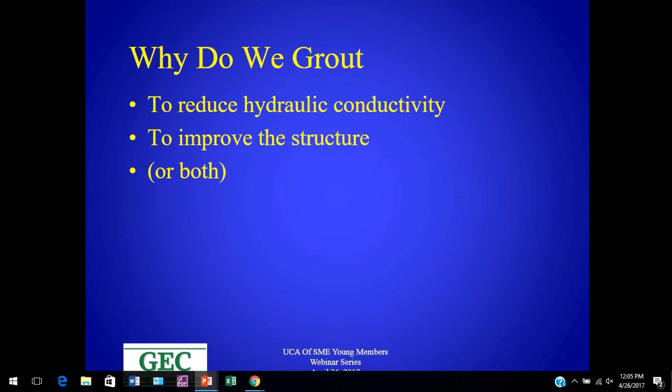So, who grouts? You do. I don't care who you are, if you are going to be working in the underground industry for any length of time, then you're going to run into grouting projects. So, therefore, you're going to have to know something about grouting. And I think that it's important whenever you're going into a project to kind of know who the players are. So I've broken it down a little bit for everybody, and a lot of times it's somewhat based off experience.

You're going to have people that have done no grouting jobs before, people that have done a few grouting jobs, some jobs, and a lot of jobs. You can generally tell people that have done no grouting jobs. I call them the blissfully ignorant. That's because these are the guys who are asking questions and they're all excited, but they have no idea what they're really about to get into.

Then we have the grouting experts. These people are easy to recognize because they come up and tell you they're grouting experts. They've probably done one or two jobs before, and it was probably before a lot of us were born. But another easy way to recognize them is that they probably aren't going to offer you solutions of how to do stuff right, but they're going to tell you everything you're doing wrong.

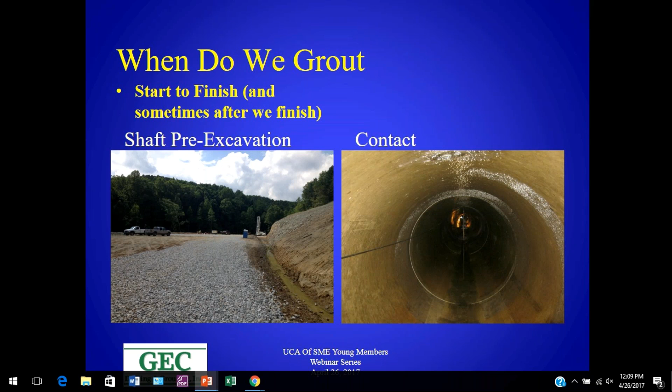All the way down to the very end of the job, when you're finalizing it, you're doing your contact grouting. So grouting can go on at any point throughout the job, and it may even go on after the job. You may go back into old tunnels and regrout them after they've been there for a while. So basically, if you're doing grouting, then you're having somebody breathe down your neck at the beginning so they can get to mining, and at the end so that they can wrap up the job.

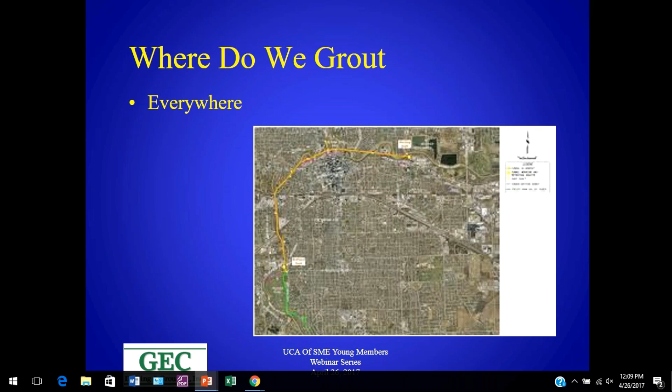Where do we grout? Everywhere. All along the tunnel alignment or within the mine workings, there's applications for grouting at any location you're at. So we'll just run through some of those real fast, where you may do it and what some of the typical applications are at each one of those points along the tunnel alignment.

As we've already talked about, you've got shafts, slopes, declines. Primarily, if you're doing grouting in these areas, a lot of the times it'll be for water control. Also, you may be grouting for support of excavation, so if you have overburden material you have to get through before you get to competent rock, you may grout that. Also structural integrity, such as your shaft liner — if you have a cast in place shaft liner, you may be grouting behind that just to ensure that it'll hold up over time.

Again, at the start of the project, we've got break-ins, we've got breakouts. Often we have to improve the ground outside of the shaft so that when we go to break through that shaft, we don't have problems with the ground. Again, that could be for water control or support of excavation typically.

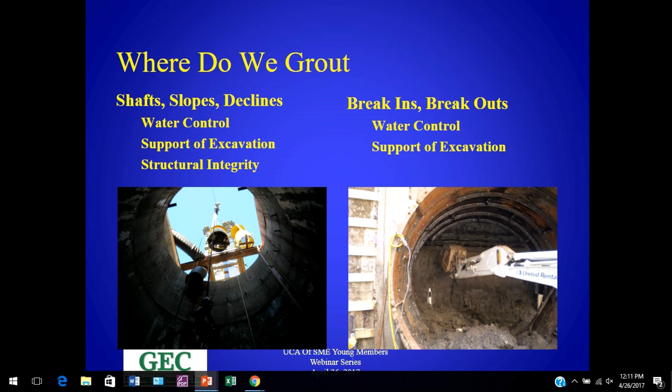Alignments: basically, any type of grouting may be done along the alignment, for various reasons. So we obviously have water control, support of excavation. If we're in a shallower tunnel that's maybe through soils, we may improve that ground before we mine through it. Settlement reduction — oftentimes you could lose ground around or above the alignment. Ground improvement for, say, a mixed face condition where we're expecting to be going through rocks but then have some kind of alluvial valley, and we need to make that soil more rock-like to efficiently mine through it. And obviously structural integrity of our carrier system, cast in place concrete, rings, or whatever that may be.

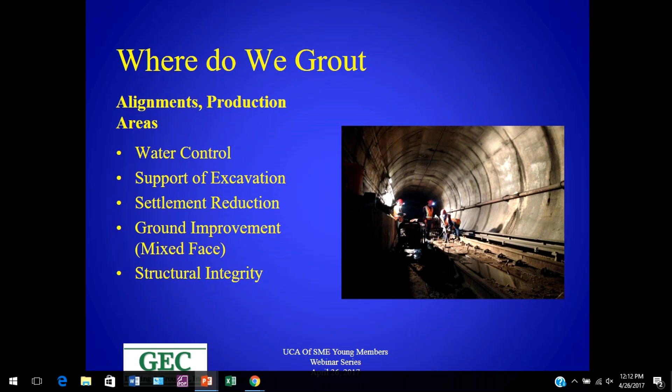And finally, any ancillary structures — basically, the concepts are the same as along the alignments and shafts. The point is just that basically every aspect of a tunnel or a mine may have some grouting associated with it.

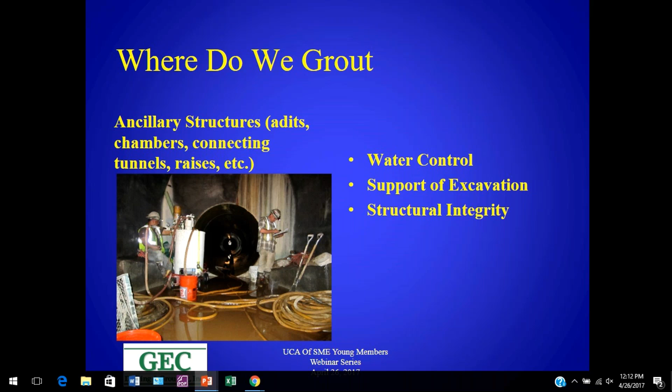So we know all these places we can grout or whatnot. So how do we grout? Basically, it's broken down into what I'd call two methods. We're either going to grout the ground, or we're going to grout the structure itself. So geotechnical grouting obviously is going to be associated with the ground.

And we break that down into 5 main categories. We'll talk about those in more detail in later slides, but here you can see the different methods broken out: consolidation, permeation, compaction, jet, and compensation grouting.

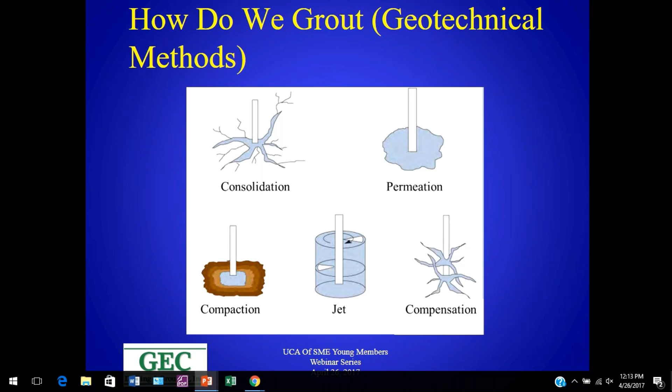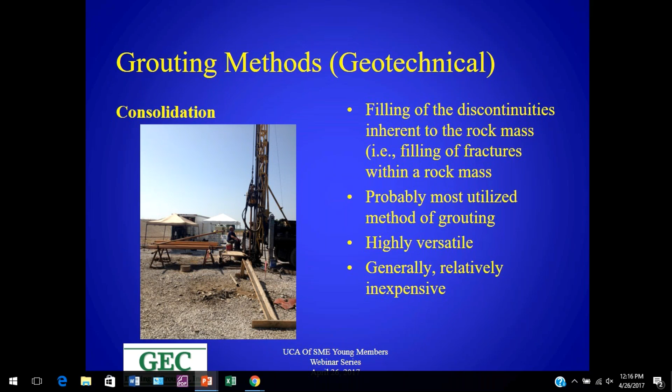Another method, permeation grouting—the concept is sort of similar to consolidation grouting, but what you're applying it to is a little bit different, and it's an important difference. We talked about consolidation grouting being to fill the discontinuities in the rock mass. Permeation grouting, you're trying to fill intergranular pore space. So basically, think about a sandy soil—you have these sand grains in there. They're touching each other, but there's space in between these grains, and that's really what you're trying to fill up.

So the space is inherent to the formation of the soil itself, or could be a rock. Sometimes we do run into permeation grouting in rock—an example would be a poorly cemented sandstone or possibly a vuggy limestone. But those void spaces are not caused by fractures in the rock; they're caused by the formation of the rock itself. So I consider that permeation grouting.

Oftentimes, permeation is going to be used along shafts and slopes, simply because it's often used in soil—you've got to get through the mine. However, if you've got a shallow tunnel, it certainly could be used there if you have ground to improve along the tunnel alignment, or if you have rock that needs to be permeation grouted, it may be done within the tunnel along the alignment or whatnot.

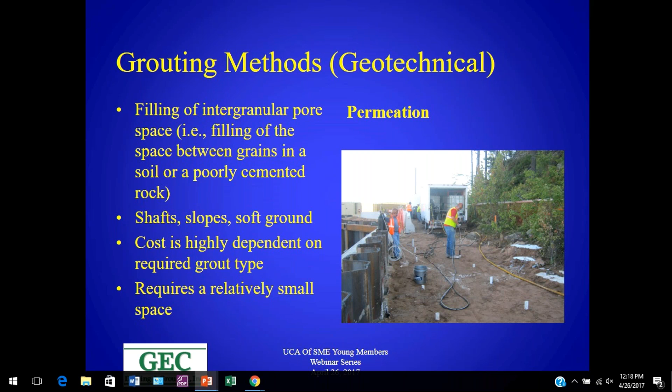Compaction grouting.

This differs significantly from the consolidation grouting, the permeation grouting that we just discussed, because in those applications we're trying to fill void space. We want the rock or soil to stay where it is. However, with compaction grouting, we're actually trying to move the soil. The intent is to put a low slump material in the ground, have it form a bulb so that it displaces the soil, and in doing so, it densifies the soil. So it structurally improves your soil.

A lot of the times it's used in tunneling, along tunnel alignments where there's been some settlement, to reestablish the ground, locate the ground elevation, and also to fill the area below the ground surface where soil has been lost. So it's sort of replacing what has been lost.

A little about access. One thing about compaction grouting is it's rather a brute force technique. We'll talk about a more precision technique in a second. But you're putting a fairly large amount of material in the ground to get this densification, so you need storage—either room for trucks or storage for material and equipment and things of that sort.

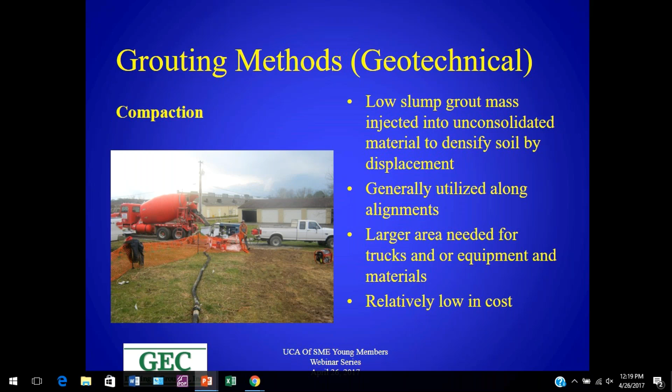Jet grouting differs from all the other types of grouting we're talking about in that it is a partial replacement method. With jet grouting, you're injecting grout into the ground at high pressures, and the intent is to cut out and remove some of the soil that's down there, and replace it with grout, plus mix in the soil that's left to get a sort of grout-soil mixture.

The thing about jet grouting is that it's probably the most versatile grouting method there is, in that it works in the widest range of ground types. So if other methods won't work, sometimes jet grouting will. That being said, it's one of the more expensive techniques. It requires a large work area, and it produces a relatively large amount of waste because it's replacing the ground.

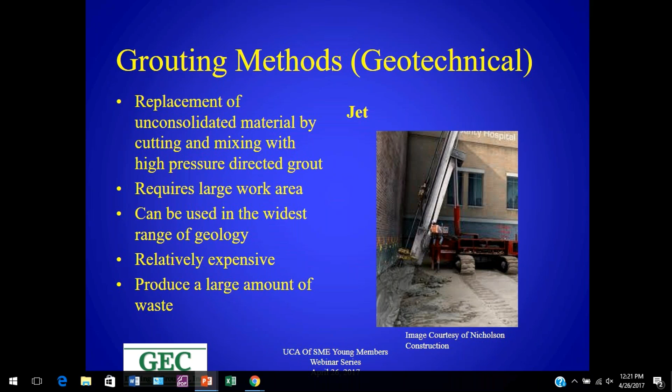The final geotechnical method we'll talk about is compensation grouting, and I alluded to this a little when talking about compaction grouting. The two are somewhat similar in what they're trying to accomplish, but compensation grouting is the more precision method for densifying and lifting the ground.

Basically, it's the injection of fairly smaller amounts of a low viscosity grout. What you're trying to do is fracture the soil and create these lenses, which then lift the ground in slight increments.

A lot of times they do this under historic buildings or areas that can't take a great amount of settlement. So you can go in and initially induce some heave in the ground, then monitor these buildings as you're mining along. If you start getting any settlement, you can go into exact locations and do some grouting so that you get some heave and reestablish the elevation you're looking for.

One of the drawbacks is, if you're doing grouting in an area with a lot of buildings, space is probably limited. Plus, you need to be underneath the structure you're trying to control the settlement for. So a lot of times you have to create work areas—as you can see in this picture, basically a shaft has had to be created for the grouting itself.

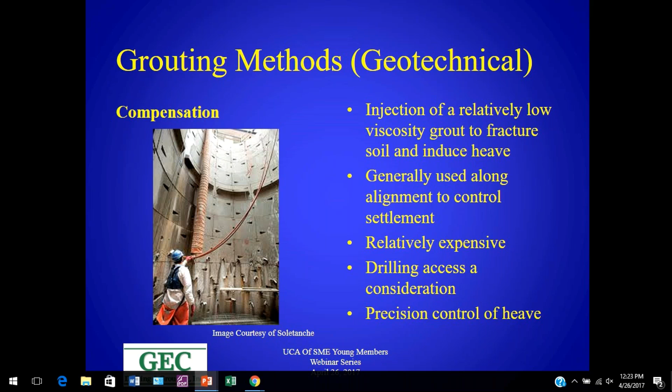Then we'll go over some of the structural things you may typically see within a mining operation. One thing that's done a lot is annular space grouting. To define it, basically you're filling the void between the surface that was mined and whatever structure you're building in that space.

So if you mine a tunnel and put a carrier pipe in, you have an annular space around that. You need to fill that space up so that there's some contact between your carrier pipe and your mined rock face. A lot of the times this material is a cellular grout or something of that nature, because it just needs to fill up that space.

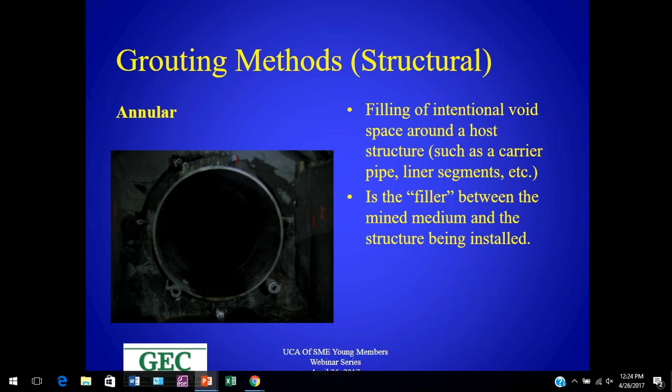Another structural grouting technique is contact grouting. The difference between annular space grouting and contact grouting is that with annular space grouting, you kind of know what that void is—you intentionally created that space to build the structure in, and built it to a certain size, so you have an idea of what you need to fill up. With contact grouting, you're going back and filling up the small spaces you unintentionally left. So if you did your annular space grouting, there's still going to be some little void up at the top of that annular space at the crown.

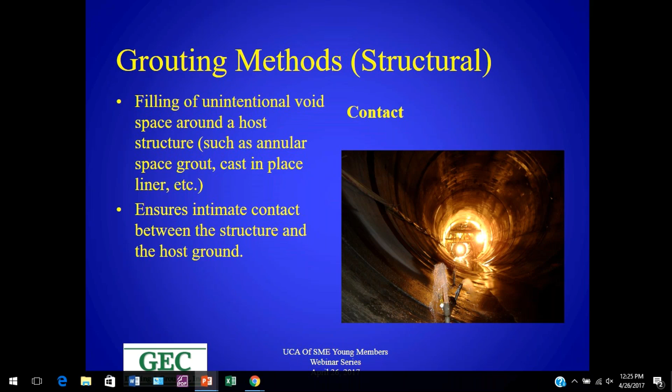Say you have a cast-in-place concrete liner, then there'll be void space left behind from your panning systems, and again just from gravity at the crown. So the intent of contact grouting is to fill up that unknown space to ensure that you have intimate contact between the structure that you built and the ground itself.

Just to throw this out there, sometimes you can get away with combining methods so that you can more efficiently achieve results. So if you take something like modified contact grouting, that concept takes the methods of contact grouting and consolidation grouting and combines them so those two different processes can happen in one operation, which makes things faster, and faster reduces cost in a lot of cases. So the point is, if you're considering a program, think about what you're trying to accomplish and try to do it in the most efficient manner.

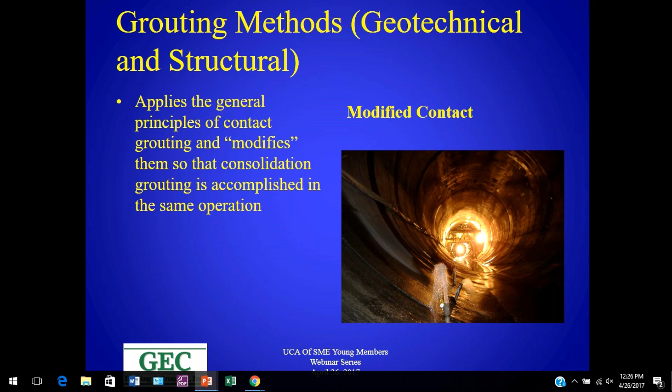So we've been through some of the major methods that you may see. We'll talk a little bit about the types of grout that you may apply, because with all of those different methods, the method does not dictate the grout type. After you choose the method, you have to choose the appropriate grout type to work for your method.

The most common type of grout used is going to be a cement grout. You've got various mixtures of grouts—neat grouts, balanced grouts. In those, there can be various types of cement: Portland cement, different types of Portland cement, microfine cements, ultrafine cements. You can take those different types of cements and your grout concept, and there's literally probably thousands of formulations you can make depending on what you're trying to accomplish. You also have low mobility grouts, and those are formulated differently, generally with some filler in them so that they don't run or travel as far.

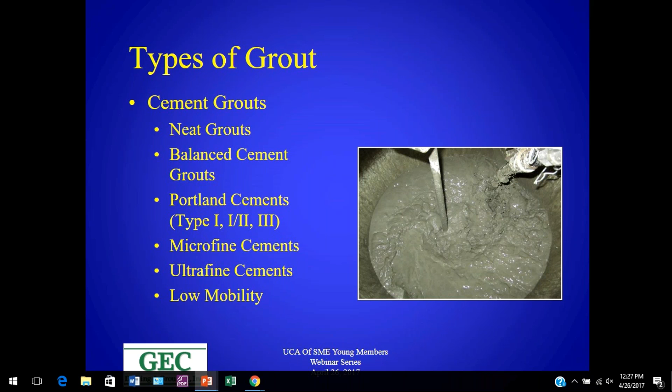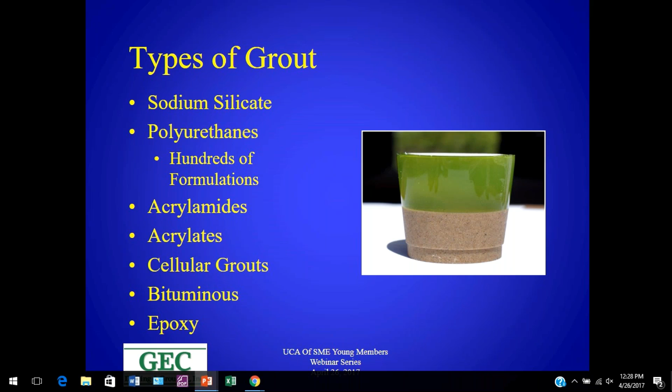Then you get into more specialty grouts. You have sodium silicates, typically utilized for permeation grouting. You have polyurethanes, which are a very versatile grout to have in your grouting toolkit, and there are literally hundreds of different formulations for them—probably dozens of polyurethane suppliers, each with 20 or 30 different formulas. You have acrylamides—there's a picture of a set acrylamide on the right, showing a cup with some sand in it, then a dyed acrylamide dumped on top, and the whole mixture taken out of the cup. These are very low viscosity grouts, about 1.5 centipoise, so they get into fractures that other grouts won't. You have acrylates, similar to acrylamides, cellular grouts, bituminous grouts we'll talk about later, and epoxies for structural repair. As you can see, there's a lot that goes into a grouting program.

Just to summarize, our basics: the why—to reduce hydraulic conductivity or improve the structure; the who you're going to be involved with; the what—are we going to grout the ground or the structure; the when—anytime; the where—anywhere along the alignment; and the how—we're either going to use a geotechnical or a structural technique, choose the appropriate grout type, and maybe combine them.

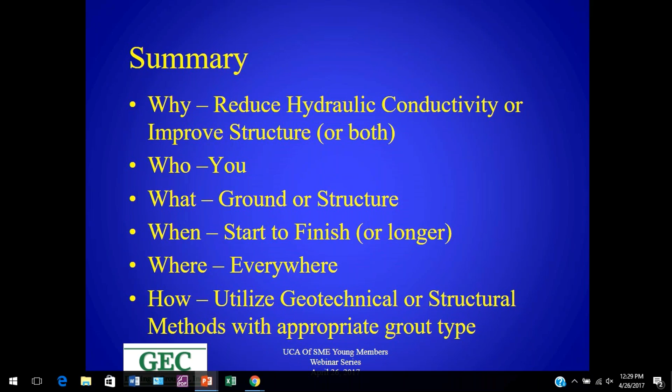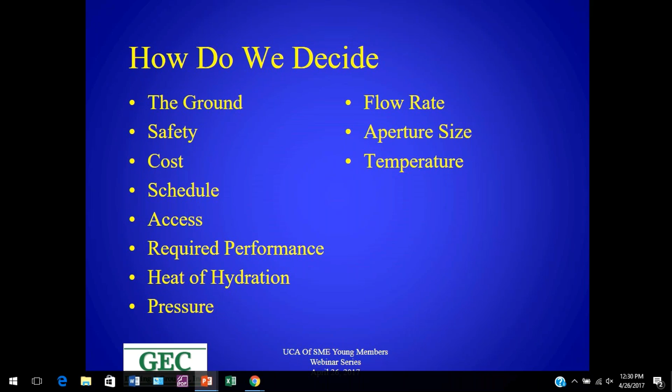So, all of that being said, how do you decide what the correct method is, what the correct grout is, all of those things to have a successful program? Well, there's no cut and dry formula, and there's a lot of things to consider. I listed some of those things here, and there's more—I'll be honest, I just got tired of thinking about it. But certain things need to be considered, and something important on one job may not be important on another, so you really have to look at the situation and determine what's reasonable for your project. I'm not going to go through these in detail, but I pulled out a couple so we could talk about some of the things you have to look at.

For any sort of geotechnical grouting, the number one thing you're going to have to look at is the ground. I have this little chart here that I stole from Hayward Baker's website—it's a pretty good little chart. It doesn't quite match up with the terminology I've used, but you can look at it, and it's set up for soil, but you can see at the bottom how jet grouting can be versatile in any soil type.

Fracture grouting, which is compensation grouting - as you can see, once we start getting into larger particle sizes, it doesn't work, simply because you have a fairly viscous grout that needs to be contained. Compaction grouting is fairly versatile, though there are special considerations for silts and clays. But when we get into consolidation grouting, permeation grouting, and things of that sort, we're limited to the left part of the scale for soils. So they're just not going to work in clays. The ground tells you some things.

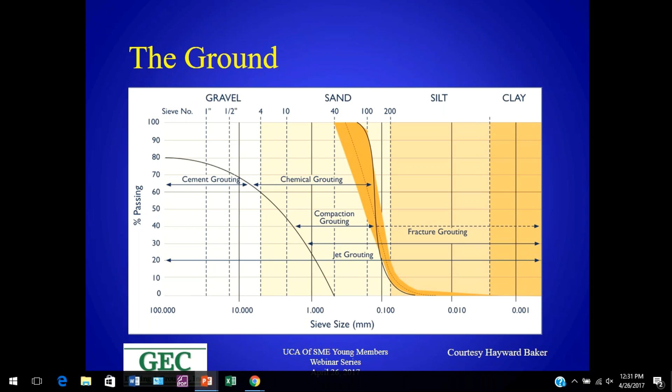Access - you may have to design your program not based on the most efficient equipment or method, but just on how you can actually do it. It's one thing if you're sitting out in the middle of a cornfield doing a job. It's another thing if you're inside a tunnel that's 6.5 feet tall and 4 feet wide. That requires different equipment, methods, and procedures.

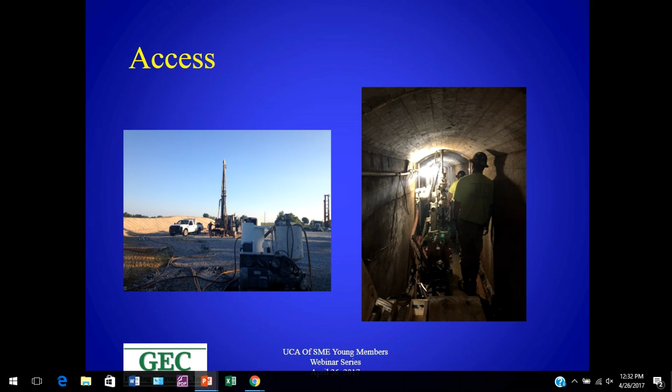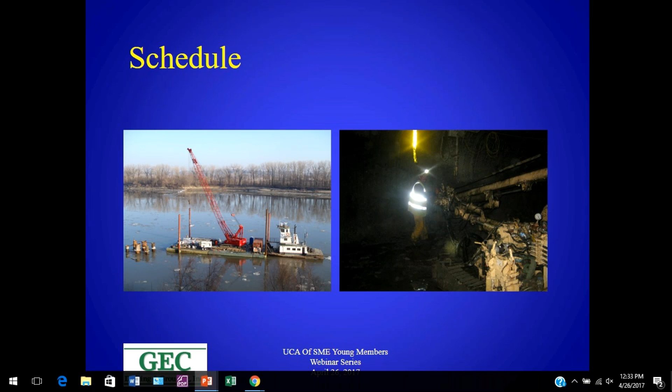Schedule - I talked a little bit relatively about cost, but I didn't throw out any numbers, and I'm not going to. But scheduling and cost are intimately related. Do you have time in your schedule to work at the face, like the picture on the right, where as soon as you start drilling you're in the area you want to grout? Or do you have to do it from the surface because you don't have time to stop and let the grouting take place in front of the mining? Or is it more expensive to shut the mining down than to have the grout crew drill through material they're not going to grout just to do the grouting? All things to consider - there's a bunch, we could spend an entire day going over those.

But I wanted to get to some projects. The intent of this, as I mentioned, is number one, to make people think about the process you go through with grouting as we talked about before. But number two, to present some things that I think may be interesting - things you may not run across often but would be interesting to talk about. So I've got three case studies here, and number one I'm titling: 'I've done this 100 times before and it worked - why isn't it working this time?' Which is pretty common.

So we start off with a pretty typical project. It's a coal mine, an existing coal mine, and we're going to construct a new air return shaft. The shaft is going to be constructed using a raise bore method, which is very common - 16-foot diameter, 310 feet deep. Pretty typical, could be deeper, but the size is about right. And they had one core hole. It was pretty close to the shaft, but it was only logged for geology - they tell you where the coal is, and everything else is just sedimentary rock.

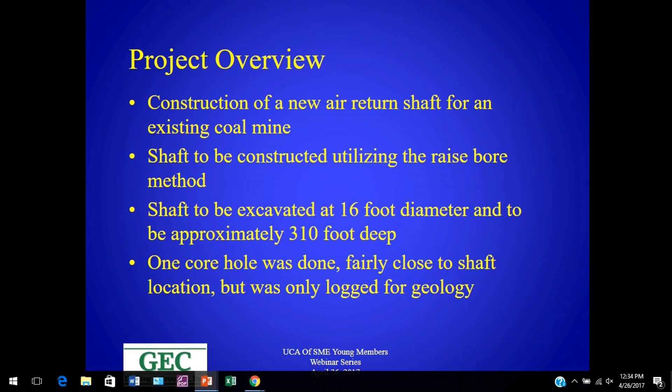So it starts off pretty typical, and they're going to do exactly what they've done before. There was a typical consolidation grouting program with Portland cement that they decided to do, and they went through and did a pretty good job of it. I had all the data for the project and everything looked pretty straightforward, except the grout.

There wasn't much grout take. The grout take on the consolidation grouting with Portland was about 9 pounds per foot of drilling, so about 0.1 bags. So it was pretty low, but actually the owner was pretty happy with that - he didn't spend much money on the grouting program, and he was good to go.

So they drilled the pilot hole, and oh crap - the pilot hole was making 25 gallons of water a minute. They called in some consultants and did some estimates, and based on what they figured, whenever they opened the shaft up to 16 feet, it could make 400 to 600 gallons per minute. So that's when we got involved, and we went out and looked at the project.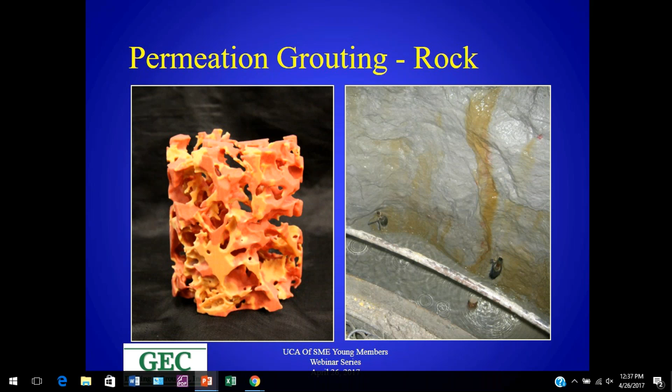So the issue with this project was that they weren't grouting, or there weren't fractures in the rock like they were trying to grout - there was this very small void space. And so that's why their program didn't work. We ended up getting a program that did, but part of the problem was they hadn't really followed proper procedure because they'd done this so many times and it had worked before. Rather than going in and running some permeability tests, getting some packer data, they just went immediately into the grouting program. If they had gotten the permeability data first, they would have seen that it took water, but then it wasn't taking grout. At that point they could have asked, what's our issue here? This doesn't make sense. Instead, they finished one grouting program and then had to go back and do an entire second grouting program to make it work.

So ultimately, we did a permeation grouting program using acrylamide and a little bit of microfine cement, and when they mined the shaft, it was making less than 5 gallons per minute.

The next one - so for those of you out there with faith, you know God has promised us he will never destroy the world again with water, but there's a clause in there which still allows him to do that to our underground operations.

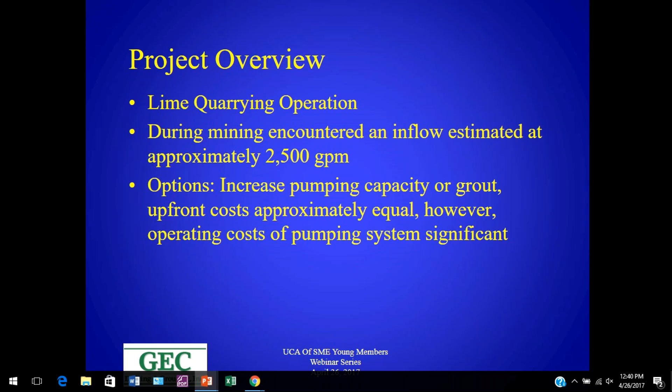So when you're dealing with large inflows like that, the best way to deal with them is with asphalt grouting. Again, it's not an application you run into a lot, so a lot of people aren't familiar with it. However, under the right conditions, it can be a very economically viable and successful operation.

So I've got this picture here - this just shows the setup from that job, a pretty typical setup. On the left-hand side, the green piece of equipment is an asphalt kettle, the same thing used if you got somebody doing an asphalt roof. Then you go over to the centerpiece of equipment, also green - that is your asphalt mixer. So basically you're transferring asphalt from the kettle over to the mixer, and at that point mixing it with typically cement. In this case, we were actually mixing it with kiln dust because they had it readily available and free from their lime operations. But the basic things you need are a very dry material, because you don't want to add anything wet to 550-degree asphalt, and something that will densify the asphalt - so you want something with a fairly high specific gravity. That's the reason the silo is sitting over to the side, because we were putting the kiln dust in the silo and then adding it.

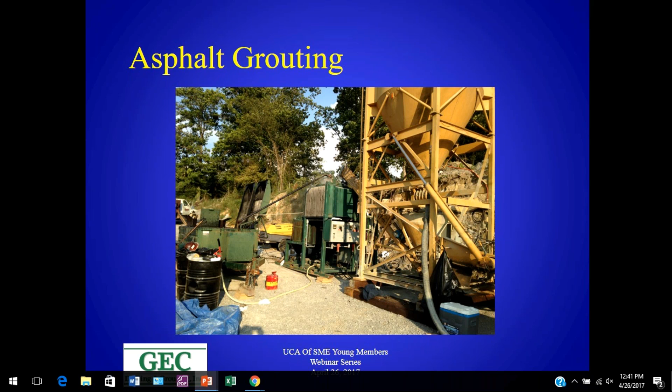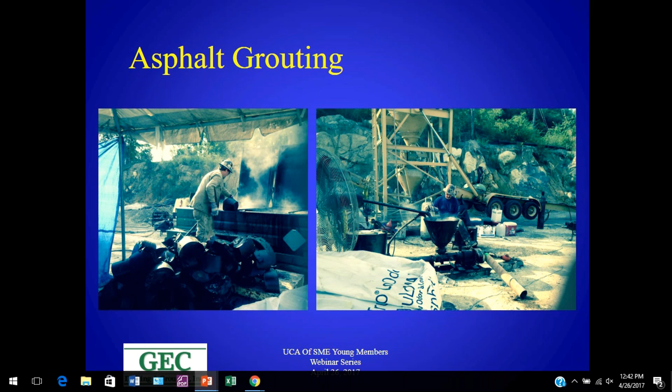Just some pictures. Picture on the left, you can see the asphalt. It's a specific type of roofing asphalt. You can see this where we busted up the cylinders, they're sitting over there. And the picture on the right is the mixed asphalt going into the pump, getting

ready to pump into the hole. So for this job, you can see the right-hand corner, that's a picture of the leak. A lot of it's underwater, but you can actually see the fracture going down through the face of the quarry,

so we kind of knew what we were aiming for. We went in and drilled a series of about a dozen holes. You can see hole number 1 shown in the picture down below of the cross section, about 100 foot back from the quarry face. We dye tested them, got various results. Hole number 1 is the one we chose to start grouting on. It had a dye test time of between 1 and 2 seconds.

So we had 2,500 gallons a minute that was moving at somewhere between 50 and 100 feet per second. And that's where we chose to do our grouting.

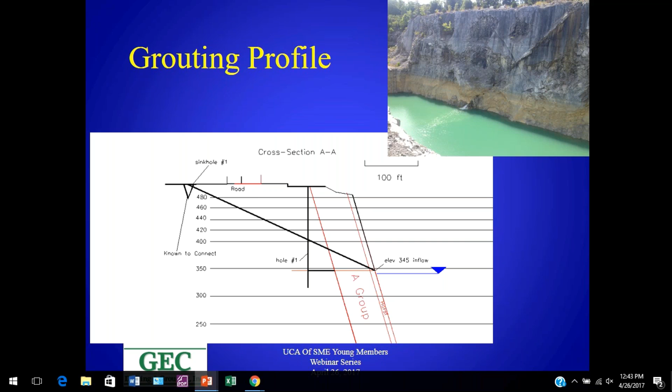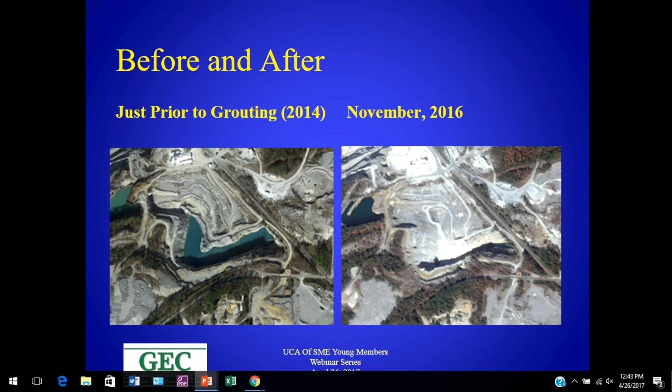I'll be honest with you, I don't remember what our final inflow was. I went back and tried to look at my notes. So I did what you do when you have a question, and I asked Google. I went to Google Earth, and the picture on the left is the pit a little bit before we started grouting in 2014. The picture on the right is the same pit about 5 months ago or so, the most recent picture. You can see at this point that the pit is pretty much dry. There's a little bit of water down at the bottom on the left-hand side.

Finally, one more unique application. Whenever I first talked to Colin, he was asking me a little bit about reverse flow grouting, so we'll talk about that a little bit. Basically, the concept of reverse flow grouting is to use hydraulic head to your advantage instead of working against you.

It's not done that often. A lot of times it's done for shaft recoveries. I didn't have any good pictures of this, so you're going to have to walk through the concept with me with some poor drawings that I did. If you want to know more about it, there was a decent amount of this done on the OARS project several years ago. I think there are some papers on it. Some of our current employees were involved with the initial part of that work, but they even adapted it so that they could use it along the alignment, I believe.

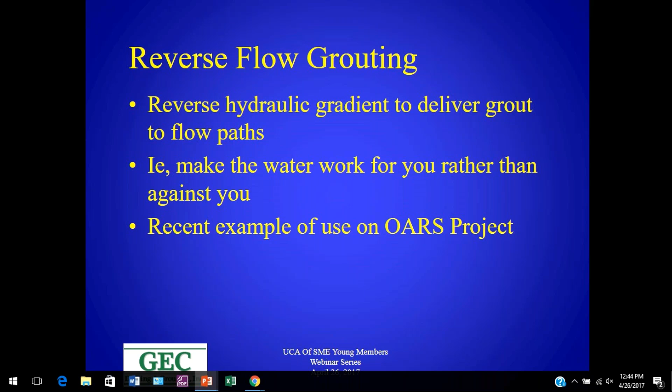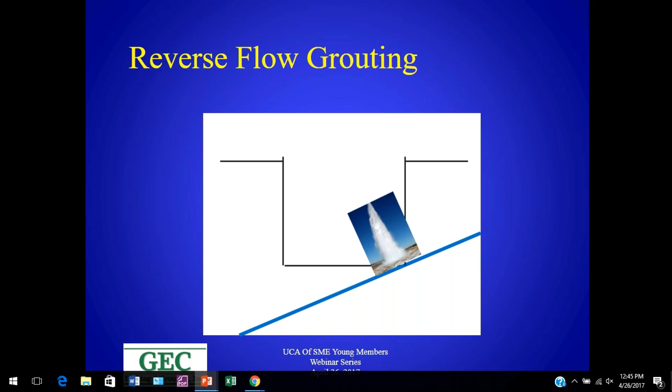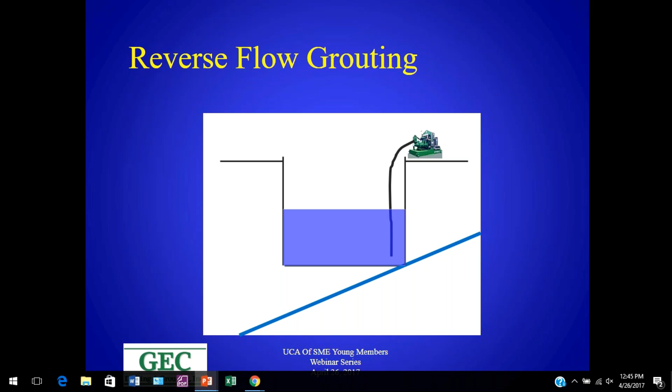But here, I'm going to run through the general concept real fast. So here you are, happily mining along, sinking your shaft, and looming below you is a water-bearing feature. You take out your lift, and all of a sudden there's a geyser that has popped up in your shaft. So you bring in pumps, set them up, and you don't have enough pumping capacity. All you can do is sort of keep it at a steady state. Then you bring in more pumps, finally get the shaft dry, and bring in the grouters.

Typically what a lot of people do is they go down there and try to attack it right at the point in the dry shaft, and every time you inject the grout, the hydraulic head and the flow just shoots it right back out at you, and you're wet, and you can't get anything done, and it's frustrating. But if you stop and think for a second, then there might be a better way to do it.

With reverse flow, you get access to this. You may have to drill a couple of holes so that you can get some grout hoses to tie into the feature. But then at that point, you start letting the flow work for you. So now, instead of pumping out the shaft, you pump back into the shaft. And instead of stopping whenever you get to your steady state condition, you fill it up to the top. At this point, you have reversed the hydraulic gradient of the shaft, and you can start grouting.

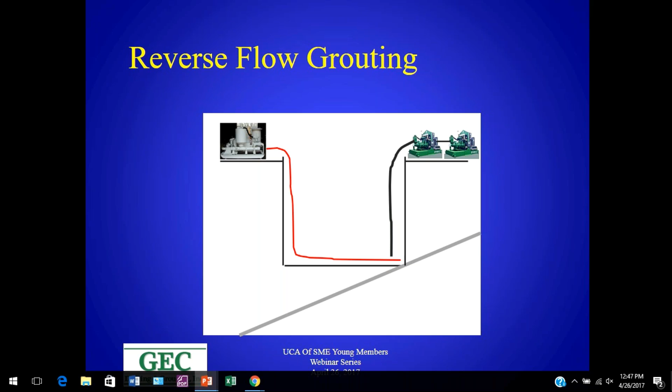And now, instead of the grout washing back at you, the water that you've put in the shaft is pushed out into the fracture where the water is coming from. So you grout along, grout along, grout along until you get the fracture filled up or to your stopping point. At that point, you can start pumping your shaft down, kick the grouters out of there, be glad that they're gone, and go back to mining.